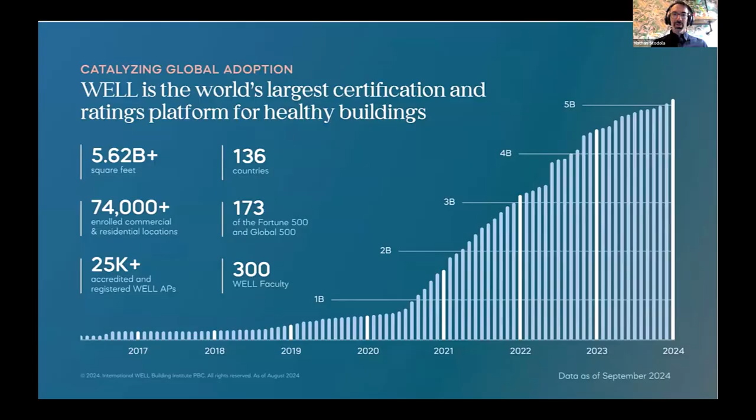And we have been around for a little over 10 years now. The graph doesn't go quite all the way back because the early numbers wouldn't show up, but as you can see, it's now in use on over 5 billion square feet across the world, in over 100 countries, and a large number of the Fortune 500 are also involved. This happens either through certification or through some of our other offerings.

What WELL started with, and what will be most familiar to you if you know the LEED program, is the certification. There are a certain number of preconditions that must be met and some number of optimizations to get points towards different levels of achievement. That represents the real leadership for particular locations. But we also have what we've identified as ratings, which are themed subsets of the features. This is a less intensive way to get involved. Some people see it as a stepping stone towards certification, some see it as an end in and of itself.

We began with the Health-Safety Rating, a collection of operational strategies to address acute health needs at the start of the COVID pandemic, when we were hearing from our clients saying, yes, physical activity and access to stairs is great, or indoor plants for biophilia is great, but right now I'm worried about keeping people alive. And so we worked on identifying the strategies within WELL suited to that purpose and made the Health-Safety Rating. Since then, we've created several others as well.

And then this can lead up to what we call the Well at Scale program, which is an opportunity to streamline documentation for review from clients as they work with the program over hundreds of locations, but also to reward incremental achievements. That if we have one building and they have done a strategy, nice, congratulations, but it's not really something that we need to get involved with as the certification program.

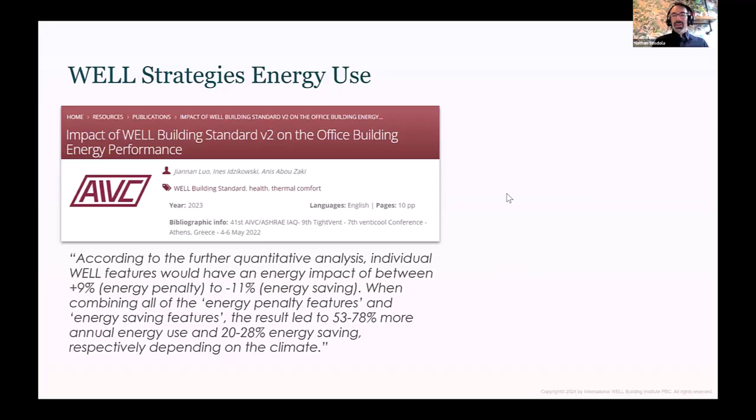Because some of the strategies, like increasing light levels during the day for the purpose of the non-visual effects, for the purpose of circadian effects, the light at the eye as opposed to on the work surface, that's sort of a change in what people design for. That might take more energy, but there's a lot of strategies there that actually can help reduce energy.

So I mentioned there are 10 concepts within the program, and we'll start with the very first one here, air. Just briefly, I'll go over everything that you'll see in it if you're not familiar with it. So the fundamental aspect of Well, the reason that it's our very first feature in the whole standard, is on-site performance testing. This doesn't just involve a documentation review of some drawing or some policy. It also includes actual on-site tests to make sure that buildings are performing as they're intended to.

So the air quality test involves tests for particulate matter, VOCs, inorganic gases. And then there's a counterpart, enhanced air quality. You can see this was a precondition. This is a must-have for every certified building, and you can get a number of points if you have even better air quality. There's strategies that involve not only design, but also policies like smoke-free environment.

So looking at the design, the ventilation, meeting the requirements for ASHRAE 62.1, also enhanced ventilation, exceeding those ventilation rates. Promoting operable windows to have people have the ability to bring in more outdoor air when needed, having permanently installed sensors and displaying that air quality information to the occupants of the building, managing pollution infiltration either through the front door or your building envelope, minimizing combustion through electrification or low combustion furnaces and the like.

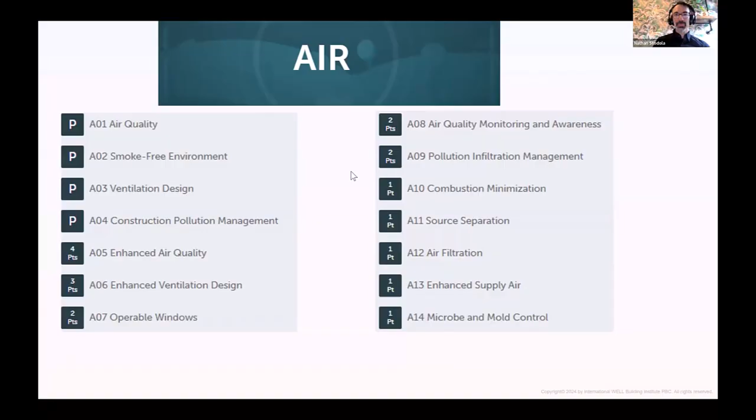So first, in our enhanced ventilation design, I mentioned that one pathway towards earning this is simply to increase your ventilation rates, go 30% above what ASHRAE 62.1 says. And that's a way that is guaranteed to lower the CO2 levels in the space. But it definitely will take more energy, especially if it's used indiscriminately when spaces are unoccupied.

So another pathway that we have is using demand-controlled ventilation, measuring the CO2 levels. Now, I know there are also methods that directly measure occupancy or measure other things, but CO2 is one of the most common ones, and saying provide however much air it takes to bring this CO2 to 500 ppm above outdoor levels or 350 ppm above outdoor levels. And this can keep the energy usage down when the space isn't in use, which can save energy.

Here it says from this Department of Energy study, between 6 and 18% savings that you could expect from using this compared to just a static ventilation design that takes no account of the people in the space.

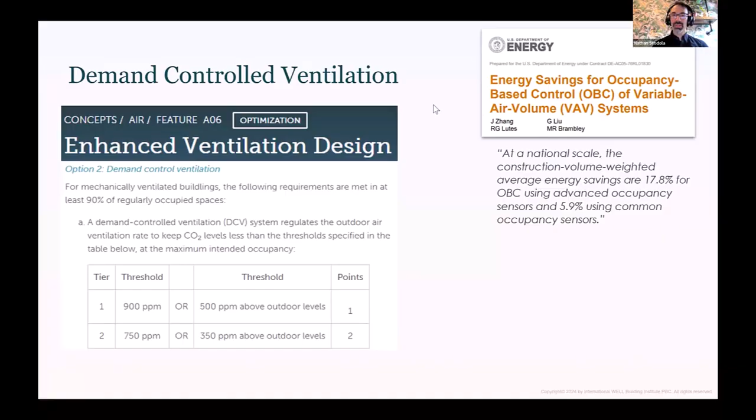Another strategy within this feature looks at displacement ventilation, the idea of providing air at a low level and at a slightly higher temperature so that it slowly will rise up to the top, and that will enhance mixing. And, for instance, in ASHRAE 62.1, there are certain ventilation rates that are prescribed, but then it has an Ez, which I think is the zone effectiveness. That's a factor that says multiply whatever you're supplying by this number.

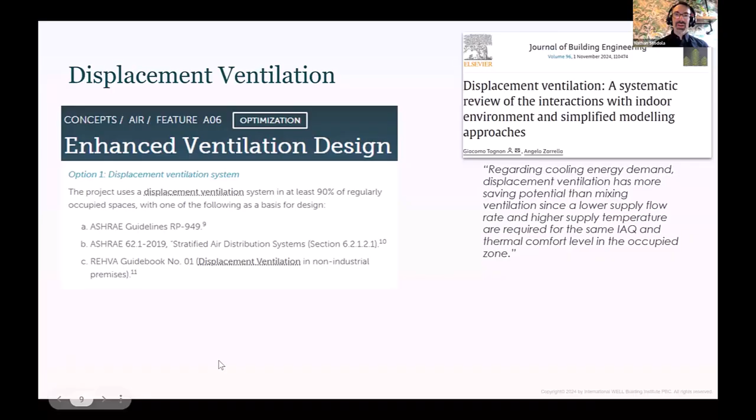And with properly designed ventilation systems, that number can be higher than 1, which just means that you don't actually even need to provide the flow rate of air that is specified. You can get away with less than that because of that factor. And as a result, displacement ventilation systems can reduce energy demand, and here they found the reasons were not only could they get away with lower airflow, but it also was just more effective at managing thermal comfort within the space, which is one of the main reasons for the HVAC system. They were able to get away with less heating and less cooling for the air that was being supplied when done with mixing ventilation.

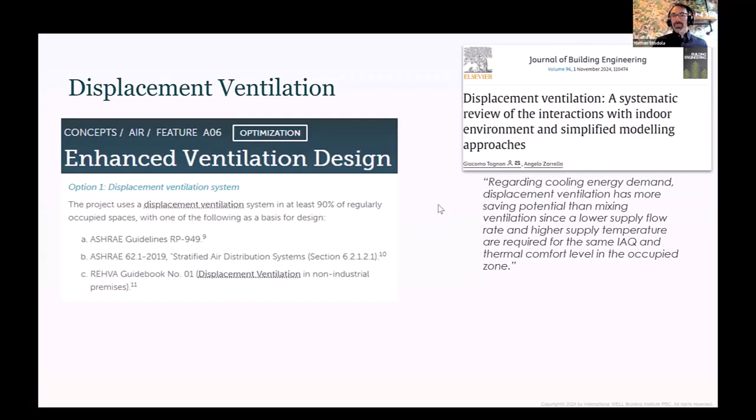And moving away from ventilation into the air treatment systems. Obviously, anytime you put an obstruction in your duct, like a filter, that is going to take energy. Fans are going to have to work harder to blow the air past whatever it is that you put in there. So compared to having no filter at all, any time you put a filter in, you're going to use more energy. But more and more groups are saying, yes, you should put in a filter. It's important because outdoor air can be bad.

Especially in countries in the Middle East and in much of India and in China, outdoor air can be really bad. And in some parts of the US, it can be not great, though on a global scale, even the worst part of the United States on an annual average is not that bad. So looking at the outdoor air levels is an important part of designing your system. There are some recommendations that just pick some blanket number and say, always put a MERV 13 filter on your return air, or always put a MERV 16 filter, like a HEPA, on your supply air for managing outdoor air.

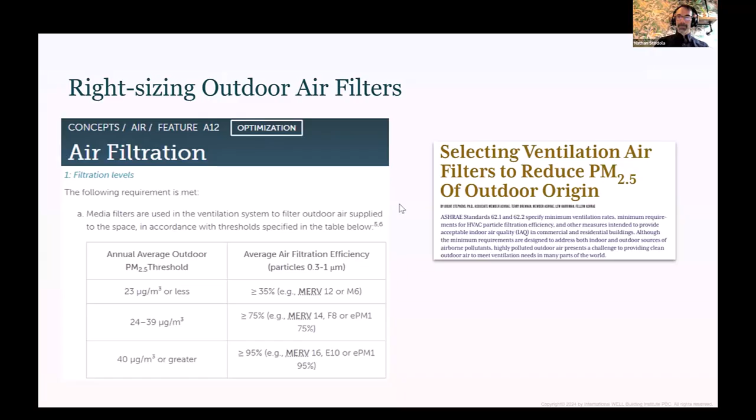Other treatment systems actually can save you energy. This feature is all about looking at cooling coils, because with cooling coils within your system, in almost all parts of the world, the fins themselves are going to be lower temperature than the dew point of the air that's going over. So by definition, that's going to create condensate that will then collect in a pan and drain out somewhere. So you're going to have moisture on them.

And mold and microbes grow if they have food and if they have water. For food, they eat just about anything, even tiny specks of anything that might be flying through the air that you never even notice. So that means the limiting factor is water. Water would be the thing that you could control. But as we just discussed, cooling coils, by definition, are going to be wet. So you're kind of in a bind there. You've got a wet space and you're going to have food, so that's going to be a space that mold likes to grow. You can go and do regular cleaning, and that's one common path, and it works.

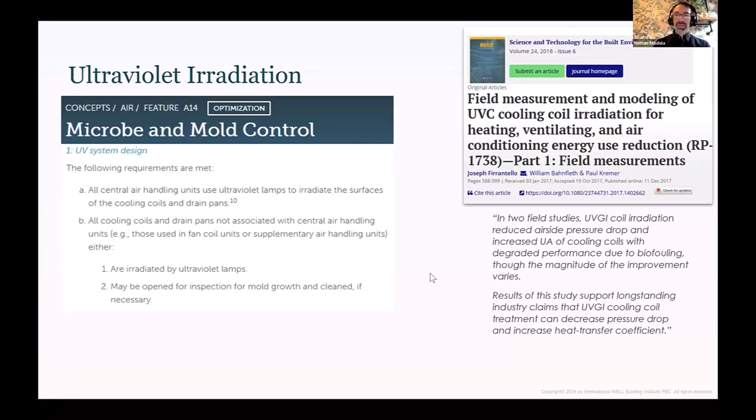Yes, there's some electricity usage for running the UV lamps themselves, but it's not a lot because the cooling coil isn't going anywhere. The other way that you can use these UV systems is trying to irradiate passing air for microbes, but there it just flies by. So you need a lot of energy to make that one work. But for UV on cooling coils, that cooling coil isn't going anywhere. So you can just continually blast it with a small power output, and that will be very

effective. And this is going to, one, of course, be healthier, because it's never good news if you are blowing air over moldy cooling coils and then sending that air to people. That's just bad news for everyone, and that's why it's in WELL.

But also, it's good for energy, because when mold starts growing on the cooling coils, that impedes the airflow more, that increases the pressure drop, and it also means that the heat transfer goes down, because now you have this mold growth in the way between the coils, which are supposed to be cold, and the air that it's supposed to be transferring heat to. So your pressure drop goes up, your cooling coefficient goes down, and so it uses a lot more energy.

So the little amount of electricity that it uses to run the lamps is more than made up for by the savings in cooling load and pressure drop load that's experienced there. So this is definitely something that can be net energy saving.

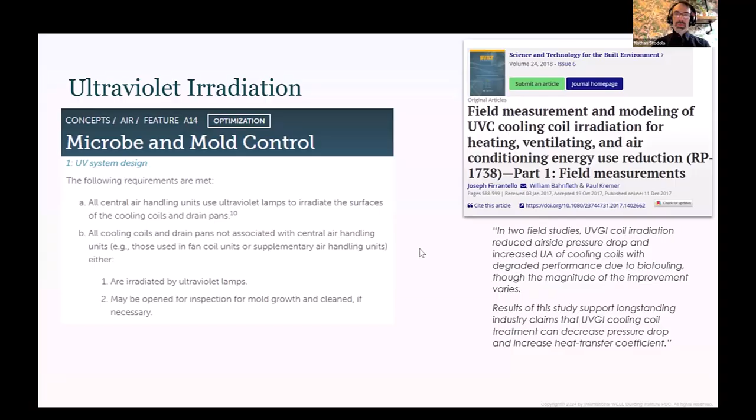We'll look at some of the other concepts. So looking at light. Light has features aiming at daylight. So a precondition on light exposure, a minimum level of daylight, and then having various architectural design strategies, or the daylight simulation, which is technically time consuming to figure out, but it's more agnostic to the design conditions. It provides more flexibility to teams. So both of these can be rewarded.

Visual lighting design, designing to make sure that people can see the tasks they're doing. Circadian lighting, designing so that the light that reaches people's eyes is circadian active, which can help them keep their sleep-wake cycle in sync. And then looking at electric light quality, the glare, color rendering, and flicker. And then looking at occupant lighting control in the space. That is our summary of everything that we have in there.

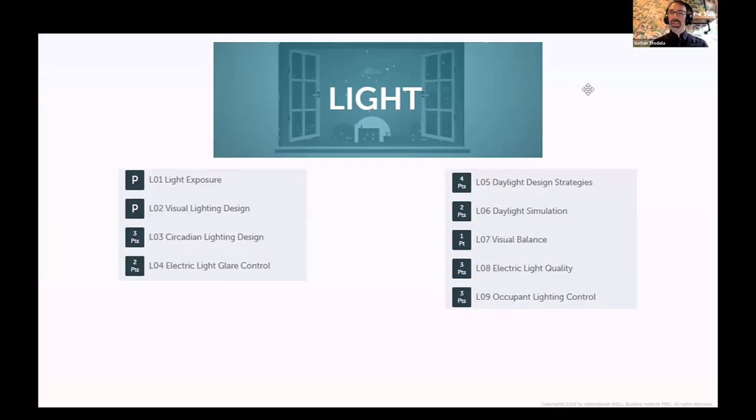And looking in particular at these, we're going to focus on daylight, which is the most obvious one for how this can help save energy. So one of the requirements, as an example, in the daylight design strategies, we say 70% of workstations are within 25 feet of the envelope glazing. Or for more points, that 70% are even closer to the envelope glazing.

And this takes some intentional design from the teams. You can just have lots of windows and then provide the same amount of electric light as before, and then you're not going to save any energy at all. But hopefully you're doing that in a way that affects the way you operate your lights.

And so the study, for example, says when you do that, whether it's with sensors to look at the amount of daylight that's coming in, or just intelligent use of switching, where you have different banks of lights and you can turn off the ones that are closest to the windows during the day, you can save between a third and 3/4 of the energy from electric light that you have.

And we can give a nod to this when we go back to our circadian lighting design, both L02 and L03. These features are others that are performance tested. There's an on-site test, but we have them tested at night to take out any consideration of daylight. And the reason is the variability. Because these tests take place on a particular day, or sometimes 2 days if the building is very large, we initially had a higher target, but we did our tests that included daylight contributions during the day.

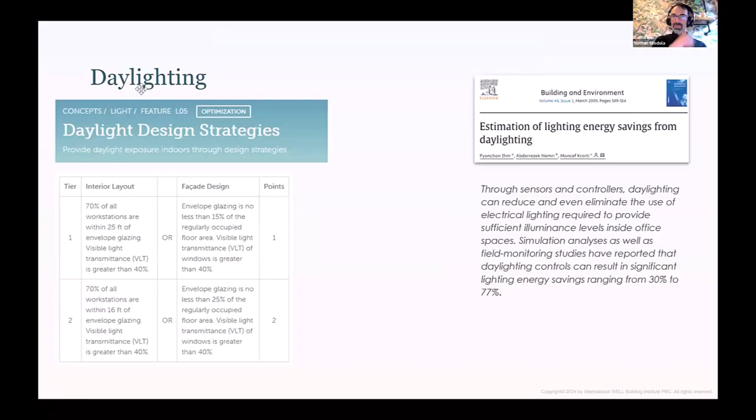Next, we'll look at thermal comfort. So just again, a brief summary of the whole feature here. We have our thermal performance. So this is an on-site test looking at measurements that will contribute to the metric PMV, the predicted mean vote. That includes the dry bulb temperature, mean radiant temperature, humidity, and assumptions about airspeed, occupant clothing, and occupant activity level. And from that, we find out if the space is meeting the criteria, the PMV plus or minus 0.5 that's described in ASHRAE 55. So that's our performance feature.

T02, verified thermal comfort, is a survey. And that can actually be a pathway to meet T01. We have a feature in the community concept that says, do a survey and gather this information, and hopefully you'll do something useful with it. But it doesn't really matter what people end up saying or if they don't respond at all. But for this feature, you have to ask them about their thermal comfort. A certain quantity of them have to respond, and enough of them have to say that they're satisfied with the space.

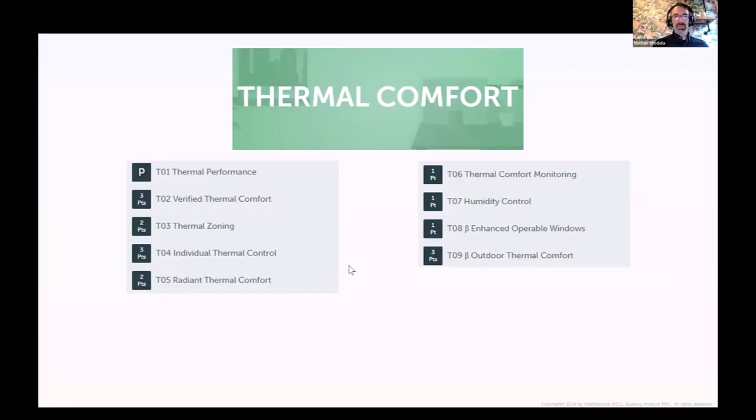So the first one I want to point out here as having an energy effect is not an engineering feature at all. It is in our individual thermal control. It's the dress code. So have a policy in place that lets people choose their level of clothing. When you look at the parameters that go into PMV, one of those is the clothing insulation. And if everyone is wearing a suit or everyone is wearing Bermuda shorts, that can have a big impact on whether this exact same space is considered comfortable or not.

And also because people have different preferences, it's a big way that you can allow for individual control within the space, even when everyone is ultimately experiencing the same environment. And this itself can have an energy impact. This study is finding that when you let people have flexible clothing, you can have a lower heating set point, and similarly, a higher cooling set point, so that you don't have to spend as much energy conditioning the space to exactly some temperature for a particular clothing level if you let people change what they're wearing.

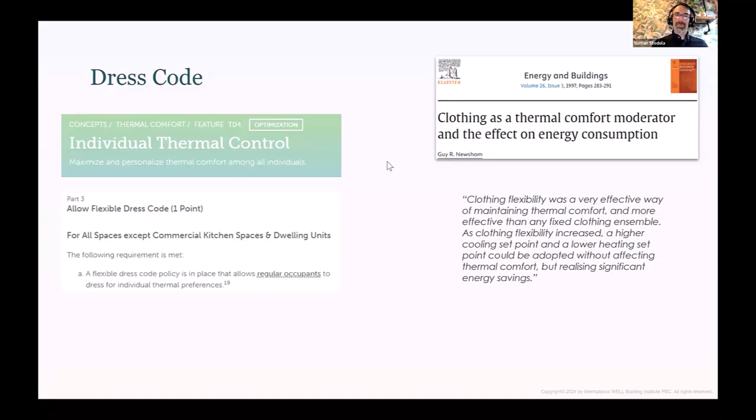The other one I want to talk about is outdoor thermal comfort. This has a number of strategies, the first of which is managing outdoor heat by having shaded spaces, whether it's your plazas, your parking areas or your pathways, to prevent giant asphalt fields that just bake in the sun, or having people walk through or stand outside in areas that are totally unshaded.

And the idea with WELL is that one of the reasons we want it is that people themselves can experience the shade as they are walking about, and that can help with their own thermal sensations while they're outside. But by providing those coverings, especially if they're done with trees, or with other things that might not absorb the sunlight in the same way, like solar panels, which would convert some of that heat into electricity instead, all that shading can also have a beneficial effect on the whole.

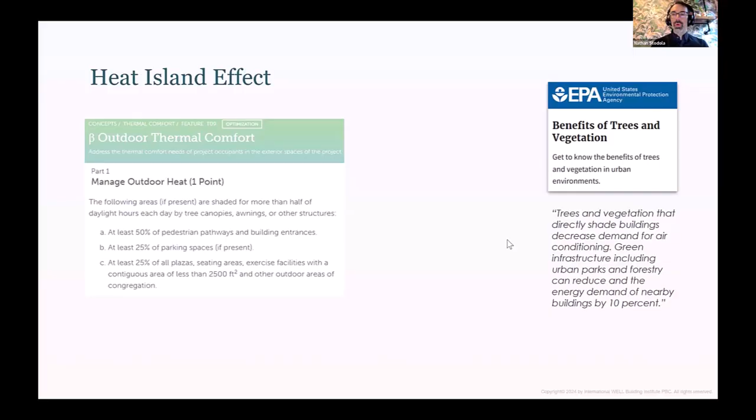Here, the EPA website describes how vegetation that shades buildings and other surfaces can reduce energy demand by 10%. A single building doing it isn't going to entirely change everything. But when you're looking at a city or a block, if every building is working like this, that can have a major effect on the microclimate and on the energy that's needed for each of those buildings.

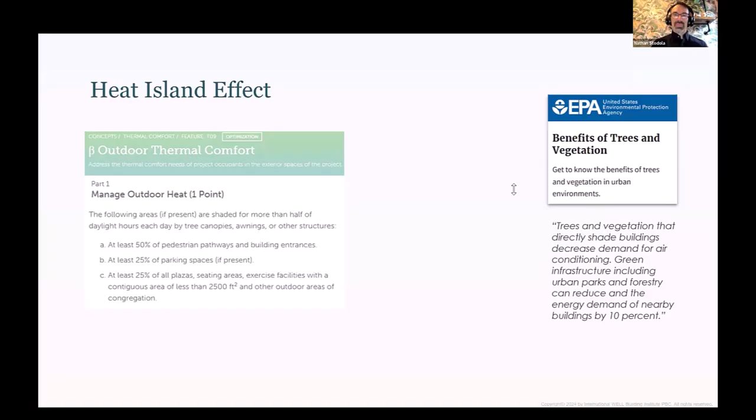Then finally, I do want to talk about innovation, where we have one feature where we acknowledge that yes, WELL is about the health of the occupants within the space, within the organization. But ultimately, if we don't address carbon emissions and global warming, we're all going to die a fiery death. So planetary health is human health.

We don't want to recreate every strategy from green building rating systems and say, oh, also save energy, use low flow fixtures because that saves water and that's less energy for the infrastructure. Also, have high thermal insulation on all your buildings so there's less heat loss and that'll save energy. We don't want to just recreate a green building standard within our program, but we want to acknowledge that addressing carbon is a human health issue.

So the last feature that we have in the program says, for your entire organization, assess your carbon emissions. For 1 point, start with just scope 1 and 2, which is what do you burn and what do the utilities burn to get you your energy and your water. That's the easiest thing to figure out, and it's often a good start.

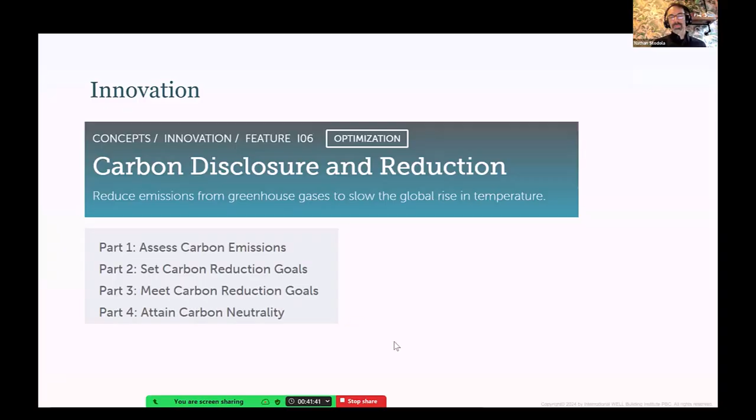Here I've been talking about WELL and energy and all of those, but I do want to get back to the point that the WELL Building Standard is not designed to be about energy. There are ancillary energy benefits for many of the features, but ultimately it is about the human experience. And so what I want to leave people with is just the idea that WELL is investing for health. And investing for health pays back.

When you go and implement these strategies and put resources towards your people in the space, then you'll come out ahead. People are the most valuable assets in your building. You might spend $1 to $3 a square foot on energy, $10 to $30 a square foot on your rent, and $100 to $300 a square foot on the salaries and benefits of the people that actually work in the building itself. So yes, saving energy is important.

And as I said, if we don't figure out our carbon emissions, we're all going to die a fiery death. But the reason to do WELL is for the occupants in the space. And in addition to every strategy within WELL being based on one of those 7,000 citations I mentioned, saying here's the evidence on why this particular thing is a good idea, there's a growing number of studies out there that have actually looked at WELL certification compared to non-certified spaces.